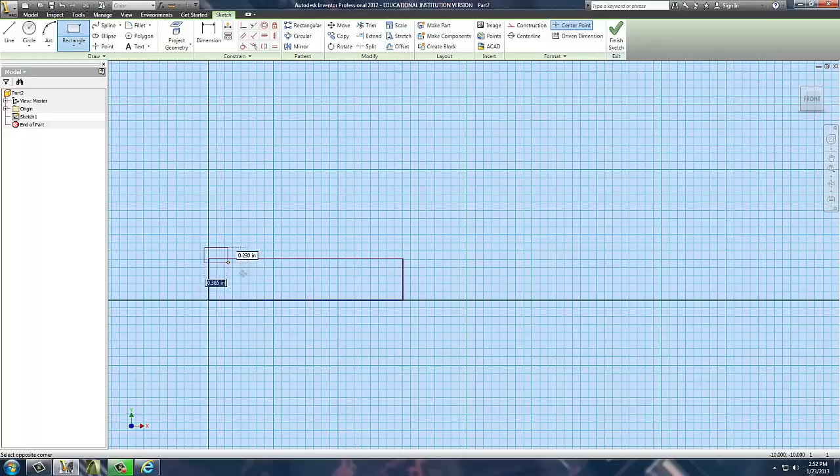Next, I'm going to remove a couple of chunks of this to notch out a few things. Once I've got that, I will use my trim command to trim out and make the notches I need. In this case, our notches should appear roughly like that, a shoulder for each end of this axle. Once we have that, we'll apply some dimensions to control this.

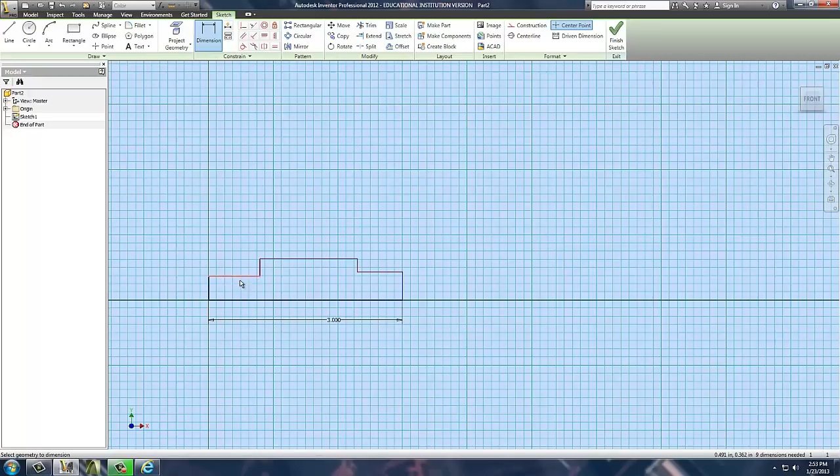We're going to begin by taking the overall dimension. This is 3 inches long total, so we're going to control that. Next, each shoulder should be 0.75 in length, so we'll control that. Now, the next part we have to worry about is the shoulder itself.

The overall diameter of the part is to be 1 inch. In our case, we're only dealing with the radius, that's 0.5. So that means that for the shoulders to have a diameter of 0.75, we need to have a 0.375 radius.

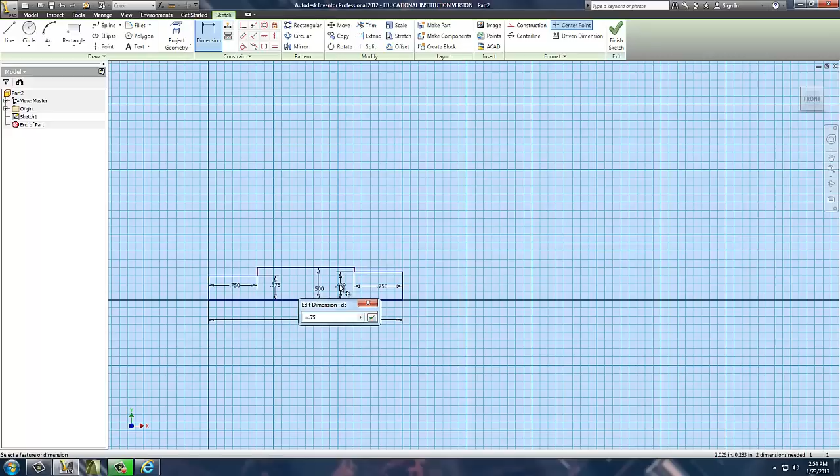Now, in SolidWorks, you can actually put in for this an equation. Tell it to be equal to 0.75 times 0.5, and it'll understand it. In Inventor, it will do the same thing. So, if you don't know what it is for sure, you can make the machine do it for you. Once we've created this, that's all we really need to do our revolution.

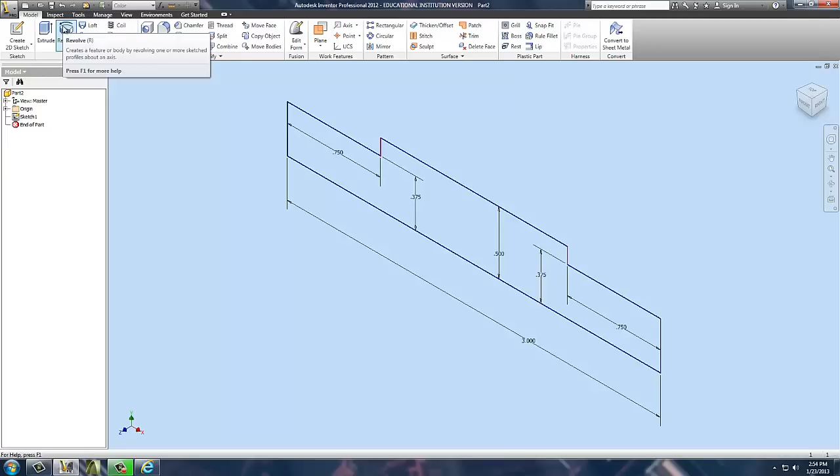Next step, we finish this sketch, we go up here to our modeling tools, we pick the revolve tool. There is only one profile available. We do need to pick the axis though, because we did not set a centerline axis. We need to tell it that this is our axis around which to revolve. And once that's done, we're good. We simply click OK. We've got it.

Now, because we didn't do it in the sketch, we do need to apply the chamfer to each end of this axle. I'm going to use the chamfering tool. I'm going to click on each end of the piece. Nowhere in here does it have the distance set. This is defaulted to 0.125, which happens to be what we want. Normally, it defaults to whatever the last use was, but in this case, we're going to leave it right where it's at, and we're going to apply that.

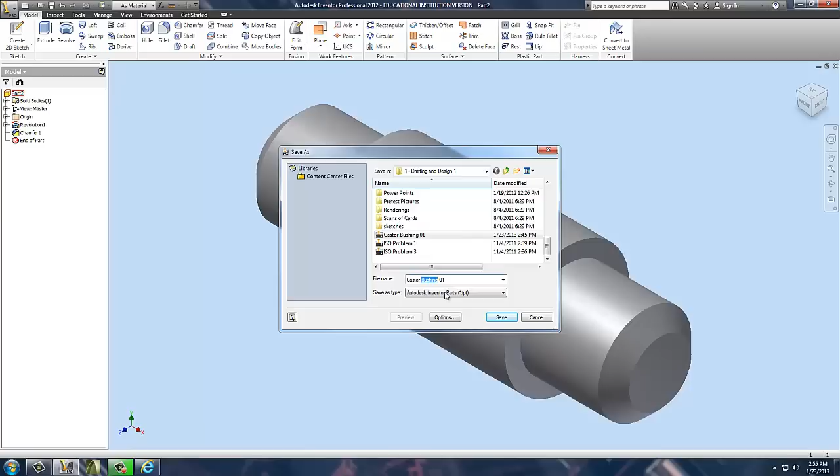Okay, now once we've got this, that's our part. If we want to, we can change its properties at this point, but in our case, we're simply going to save. We're going to put it in the same folder we did the last one. We've got a Castor bushing. This is going to be a Castor axle. We're going to tell it to save.

Now we're going to change its properties around for just a minute. We're going to go to iProperties, then Physical Properties. In this case, default material probably wouldn't be good enough. This would most likely be made of steel. If we had carbon steel, I'd use it, or some other durable material. I'm just going to tell it to be an alloy steel because aluminum ain't going to cut it. We're going to hit apply, go OK.

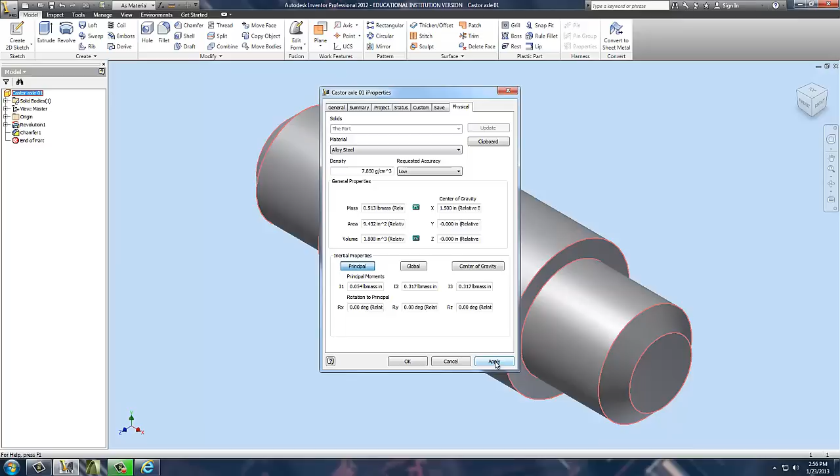We've got that. Hit the save button one more time. This is all we need to do.